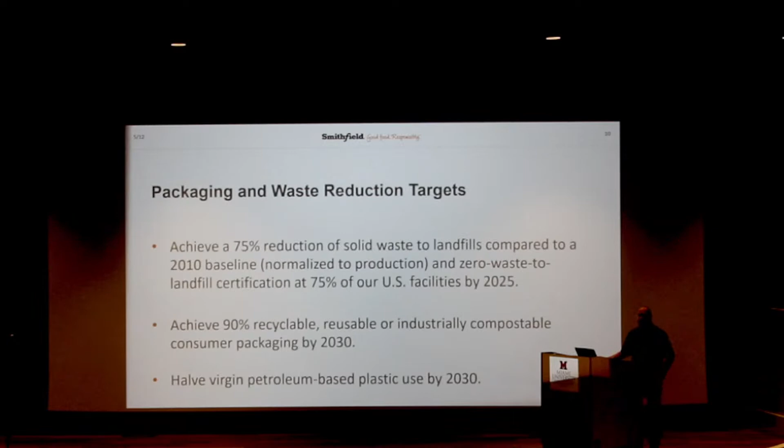We have others with food loss and waste reduction. We've got others with greenhouse gas emission reduction. We've got huge programs for a lot of different things, but we're going to talk about our zero waste to landfill program today. So how do you get there? Like what's the process? What does it mean to be zero waste to landfill?

So we define it internally that you don't send anything to landfill for 12 months in a row. So it can't be just 1 month and go back to putting stuff into the landfill. It's got to be a sustained program, and we audit it every month, and we make sure that we fulfill that. Minimum 10% reduction in total waste from our baseline, recycle or reuse greater than 50% of the waste, and the total cost basically has to be cost neutral. It can be a little bit above, 5% above what the baseline cost is, but effectively it has to be cost neutral.

So, when did we start this whole thing? We started basically out in 2012. We came up with the thought process of having one zero waste to landfill facility by 2018. And this is actually in Peru, Indiana.

So anybody from Indiana? Couple, there you go. So that's great.

And so Peru is just north of Indianapolis, north of Kokomo. And they took the initiative and became our first zero waste to landfill facility. And then after that, again, by 2018, we wanted one. We had 12 facilities by 2018. And right now we have 21 of our 45 or so operating facilities, 50 if you include distribution centers, zero waste to landfill. So we're really making a mark, you know, relative to our peers in the industry. Yeah, we're miles ahead of them.

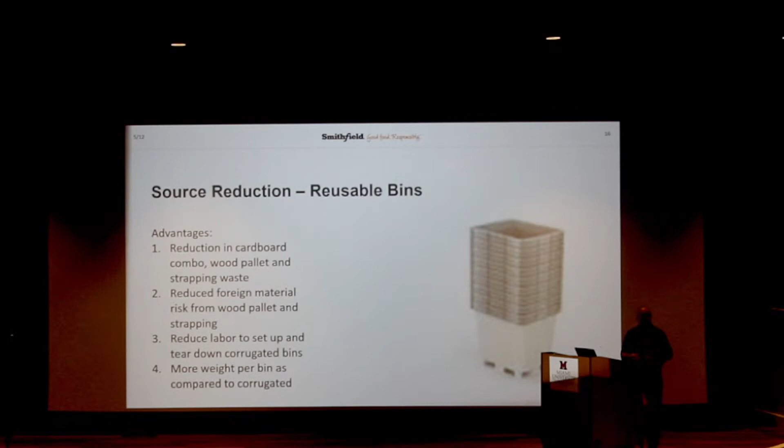You don't need the strapping around it, so it's fully self-contained. And then the other part of it is make it easier for people to do the right thing than the wrong thing, right? To put it in the right place to be recycled versus putting it in the wrong place and have it go to the landfill. So we try to do that at our operating facilities throughout the US, and again, we have it in different languages, right? And we have to try to do pictures, and we have to have receptacles for it to go the right way.

So this is just a picture. We're going to go through a couple pictures of kind of the things that we do. And cardboard is huge because, again, for that cost effectiveness deal that we've got going, it's got to be cost neutral, you know, plus or minus 5%. This is a huge way of getting there. Cardboard, especially baled, goes for about $150 a ton.

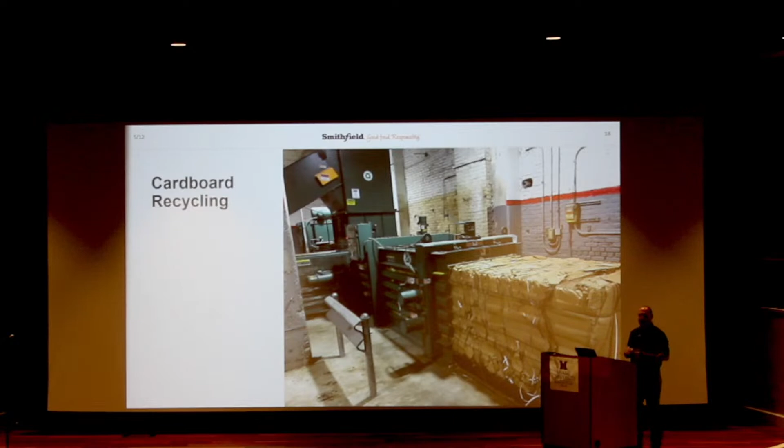And so if we can effectively take any and all cardboard that was going to the landfill, bale it or put it into a compactor, sell it as a product, get $150 a ton for it, right? That funds a lot of the other things that we need to do that cost money to get to zero waste to landfill. So this is our funding source, and we got to make sure that 100% of our cardboard actually does get recycled and none of it goes over into the bin that goes to the landfill.

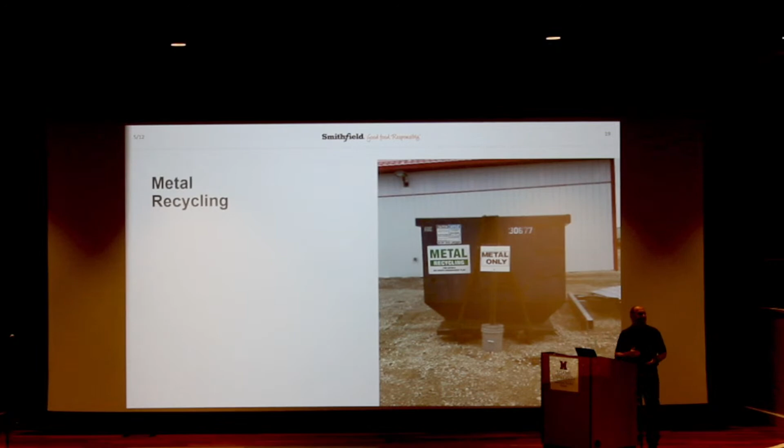So metals too, metals, especially stainless steel, is astronomical price-wise. You get a great rebate for metals. And so we got to make sure that we recycle 100% of our metals and actually separate out the carbon steel from the stainless steel, right? Because you get a better price for stainless steel than you do for carbon steel. So again, that's a revenue source, and we got to make sure that we recycle our metal.

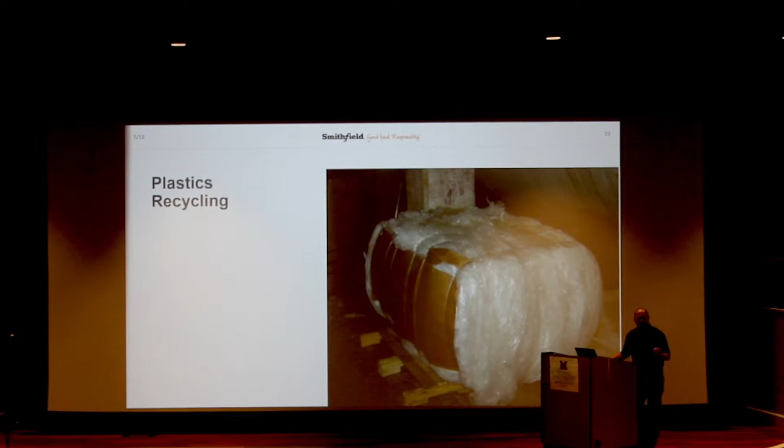And then plastics recycling, this is kind of one of the tough ones for us. They will take clean, like LDPE, low density polyethylene. It's a type of plastic that people like, but really they don't give you a whole lot of money for it these days. And so it's tough to recycle plastics, and especially what we call protein contaminated plastics. And so if it's got a little bit of purge or blood on it, just nobody wants this stuff.

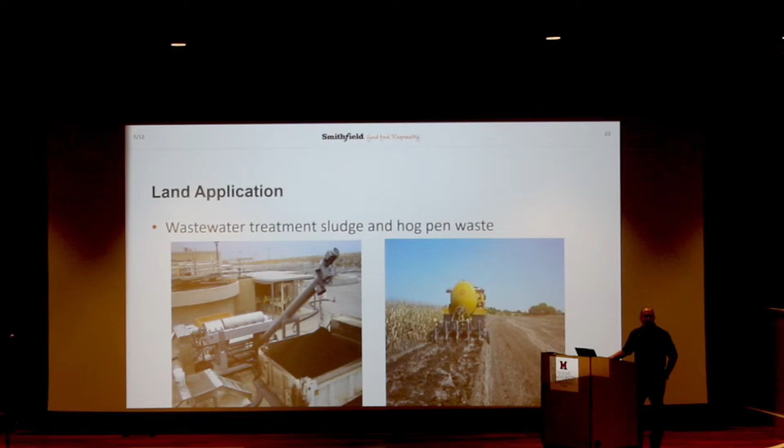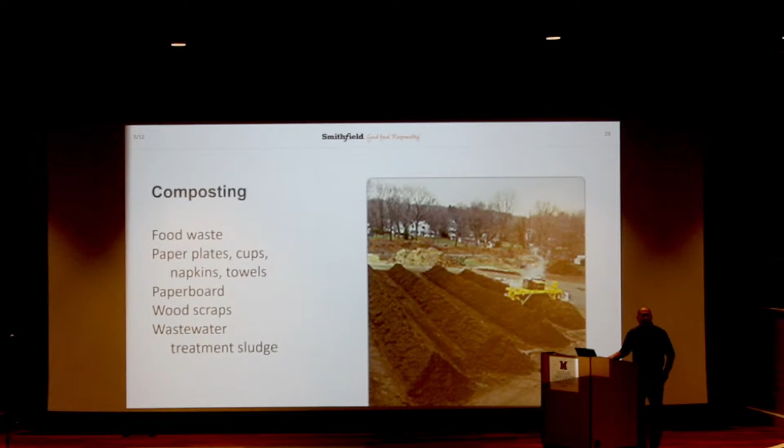Okay, composting is another part of what we do also. Food waste, plates, basically just, again, anything kind of organic can go to a compost facility. Anaerobic digestion, this is really interesting actually, because again, this gets into our greenhouse gas reduction process. We can generate renewable natural gas off of anaerobic bacteria that then generate methane, biogas that is mostly methane.

You strip out everything that isn't methane, and you can inject that into a natural gas pipeline as renewable natural gas. And it's worth about 20 times what normal natural gas is. So this is a big money maker for us. We're spending millions and millions of dollars, actually close to $500 million, on covering up anaerobic lagoons at our hog farms and our operating facilities, and again, generating this biogas that then becomes renewable natural gas. But we can take some of our organic waste to these as well.

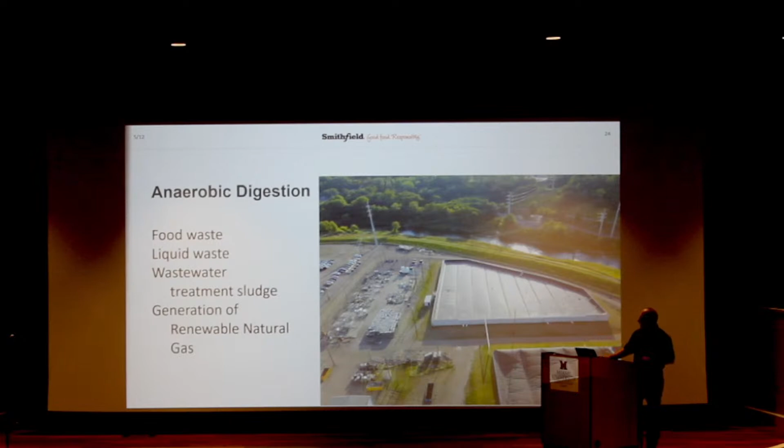So there's commercial anaerobic digesting companies as well. So even if we don't have a farm or an actual facility that has a rendering facility there, we can actually take it to a commercial anaerobic digestion process. And then last but not least, for everything else, and that's typically only like 5–10% of our overall waste product, typically it has to go to a waste to energy facility.

What that is again, instead of a landfill, you burn the trash and you generate electricity off of that. So there's commercial folks around the United States that do that as well for us again, but we try to recycle everything and minimize this because this costs a lot of money, a lot more than it costs to send stuff to the landfill.

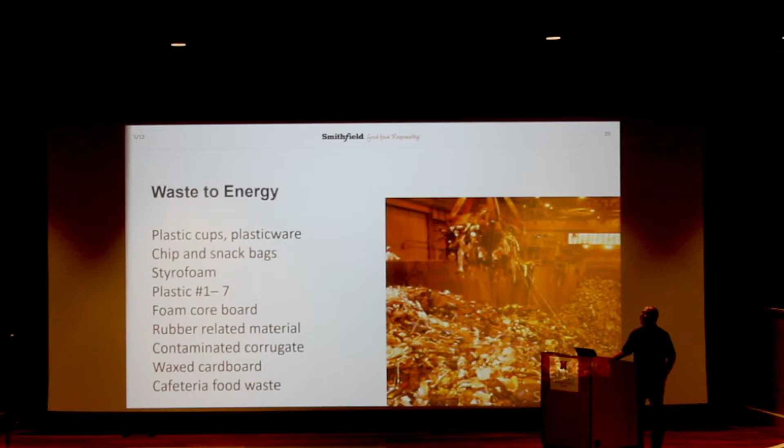So South Dakota folks, anybody from South Dakota? Nobody from South Dakota.

Well, this is our Sioux Falls facility. It's one of our largest ones, second largest next to Tar Heel, North Carolina. And I just wanted to highlight a couple things that they do. It's huge. They employ over 3,800 people at this one plant. It's 105 acres, 2 million square feet of operating capacity at this location. They harvest over 20,000 head a day there, produce 1.6 billion pounds of product, and purchase and use a little under 2 million gallons of water a day. So it's a very, very large facility, sits on the Big Sioux River that runs around it.

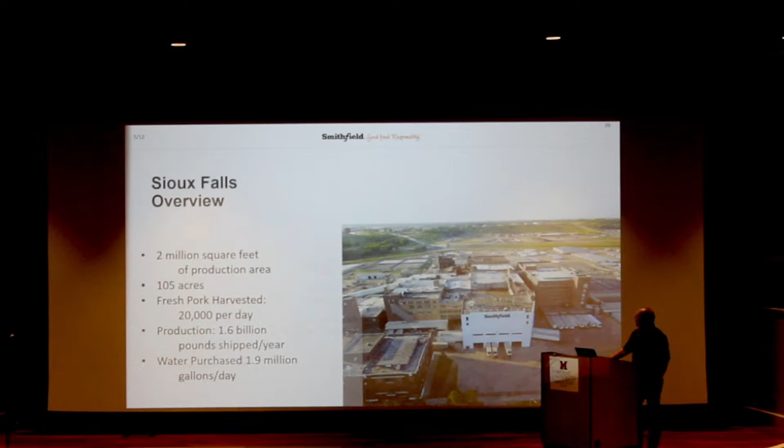But some of the things that we did, again, started in 2012. This is a program where all of our wastewater sludges were going to the landfill. And I went, gosh, that's not the right way to do this. And so we partnered with a firm that helps us out and finds farmers that want this material, and we'll transport it over to these locations. And then when the crops are out of the fields, so once in the spring, once in the fall, we do land application.

And again, for us, 2.4 million pounds a month used to go to the landfill and is now going as a soil augmenter and a natural fertilizer to fields around northwest Iowa. So that's a big thing. And again, cardboard recycling, they do a great job. Almost 600,000 pounds of cardboard is recycled from this facility every month. It is staggering, right?

So we do have a second objective, which is, on a normalized basis, to reduce the amount of tons of solid waste going to the landfill by 75%. When production increases over time, you generate more waste, so we have to kind of normalize that. But our baseline was 2010, and we sent 182 million pounds of solid waste to the landfill. It seems like an incredible amount, but that was based off of a production volume of almost 10 billion pounds. So a baseline of 1.9 normalized solid waste to the landfill per 100 weight of production.

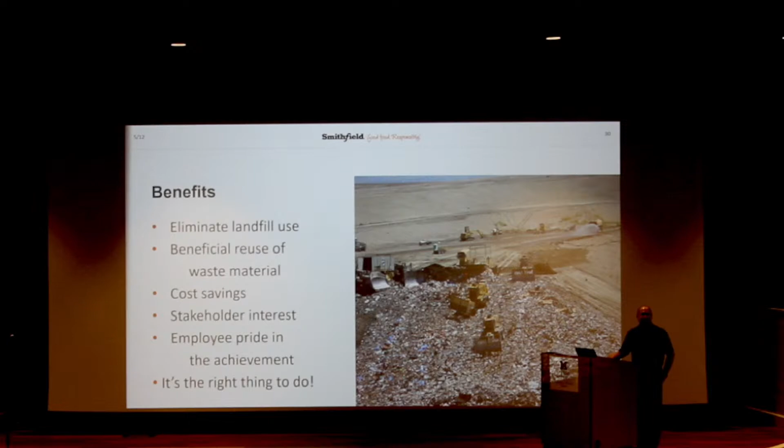So that's what we have on zero waste to landfill. And I hope you enjoyed it.

Do you guys have any questions or anything? Be happy to take a question or two if you had anything. Okay, go ahead.

Yeah, well, clearly that's important in everything, but definitely, we want to find a good partner for recycling. So we want to find actually a company that'll help us out with a lot of different types of materials to recycle, and one that's very stable themselves, right? So they'll be there for 5, 10, 15 years and be our partner.

And they need to be innovative as well and try to find better ways of recycling and better ways of using more of our stuff that we consider waste that would otherwise go to the waste to energy facility. So a lot of it is just partnering with the right people that have the same common goals that we have. And certainly money is part of it, but what they do with it is very important as well. So we want to make sure that they're trustworthy partners. So, go ahead.

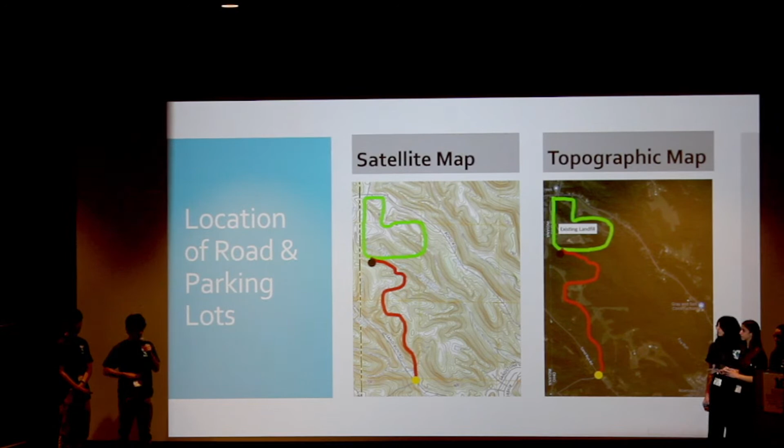And while this site has limited excavation potential, it's not too big of a deal for us because the soil the road is going over has too low of a clay content to be useful in stockpiling or covering the landfill on a day-by-day basis.

Okay, so I'm the environmental engineer and I'm in charge of landfill and site operations. We can use best management practices to make the construction and short-term use of the road more sustainable. Placing buffer strips of forest and vegetation along the road and streams will reduce soil erosion and runoff. To prevent sediment and dust pollution, which impact soil and water quality near nearby streams, we'll spray construction sites with water. Avoiding the use of heavy equipment during and after rain will prevent soil compaction.

Also, using recycled glass and asphalt and following the 4 R's of waste management, reduce, reuse, recycle, and repurpose wherever possible, will minimize the project's waste stream. Finally, we should reduce the area disturbed by construction to protect wildlife habitat. To operate a municipal solid waste landfill like Bond Road, we'll need to follow regulations and guidelines set by the Resource Conservation and Recovery Act and Hamilton County's Solid Waste Management District. We should also implement long-term best management practices to maintain the site and protect environmental and human health.

The new extension currently being planned for the landfill will decrease the amount of leachate, which is water that trickles through the landfill and becomes contaminated by chemicals in garbage, that needs to be collected. However, leachate collection systems are still very much needed to remove it from the landfill to reduce the risks of it seeping through the liner and contaminating nearby soil and groundwater.

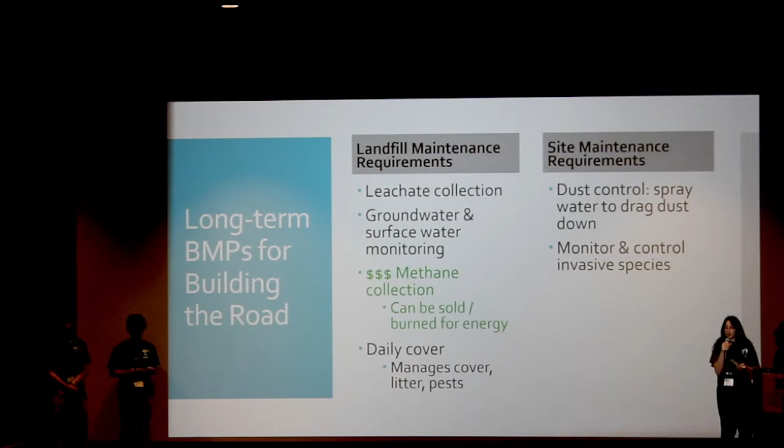According to Daniel Thompson, a wildlife expert, disturbed sites are easily overtaken by invasive species, so monitoring should be done to prevent the spread of species like bush honeysuckle or Callery pear. If the plants are small, they can be controlled with physical methods, and herbicides can control them if they grow too large. As the environmental consultant, I'll be addressing measures that we can take to improve habitat, wildlife diversity, and aesthetics at the site once construction is completed.

First, planting a perimeter of trees around the site will reduce noise escaping to the community, hide unsightly views, filter air and runoff, and create valuable edge habitat for edge species like white-tailed deer and wild turkey. Further, these trees could be planted by volunteers or students as a community service or education initiative.

In these perimeters, native oak and gum trees should be maintained as they grow very well in southwestern Ohio, which has led to a concentration of oak gum forests in Hamilton County. Maintaining these oak and gum trees will lead to production of both hard mast in the form of acorns from the oaks and soft mast from the gum trees, which will attract a wide diversity of wildlife that consume both hard and soft mast.

In addition, spring ephemeral flowers planted around the perimeter and throughout the site will attract pollinators that feed on the flowers' nectar and pollen, creating very much needed pollinator habitats. Another improvement we can make is turning the existing man-made pond on the newly purchased land to a man-made wetland, which has numerous benefits such as slowing runoff, allowing more water to infiltrate, acting as a sink for nutrients and pollutants carried by the water, and providing habitat for wildlife.

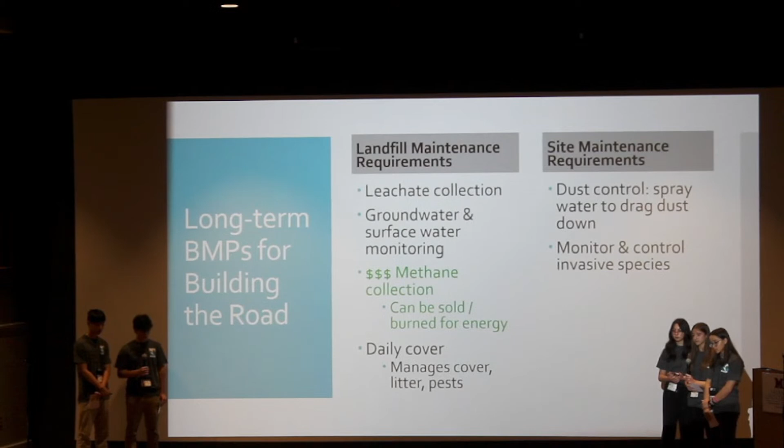So yeah, you did a very good job covering a number of questions. You did talk about the route you chose, but I wonder if you could speak a little more about the alternatives you looked at to this route, because I'm sure that was a prime consideration.

So one of the major limitations was that there's a lot of very tall peaks. So we wanted to take the most direct route possible, but also avoid any super sharp turns. So we originally tried going left, but then we found we're too close to the Indiana-Ohio border, so we would cross state lines, and we wanted to avoid that. And going right, there is the Fox Run River, so we wanted to avoid building over the river. So we thought it best to navigate through the summits and peaks and go through the valleys, and in doing that, it's a more direct route. We're avoiding state lines, and we're avoiding the river.

And also when we were planning, we noticed, looking at the soil map, that there was only really this one particular stretch of the land that we constructed our road into that actually did not have as severe limitations for building. So this also takes that into consideration and plans to build the road specifically on that stretch of soil.

Yeah, the strip we built the road on, the vast majority of it is the Switzerland Silt Loam Road, and that has far less limitations in terms of steepness, so we thought it best to build the road there. Also, the main problem with the current entrance is that there's a very sharp turn, or many of them, that are hard for large garbage trucks to pass through.

So in building this new road to increase utilization of the landfill, we really want to reduce the sharp turns and sharp high peaks that the trucks would have to go through so that they can carry more trash to the landfill and increase its efficiency and utilization.

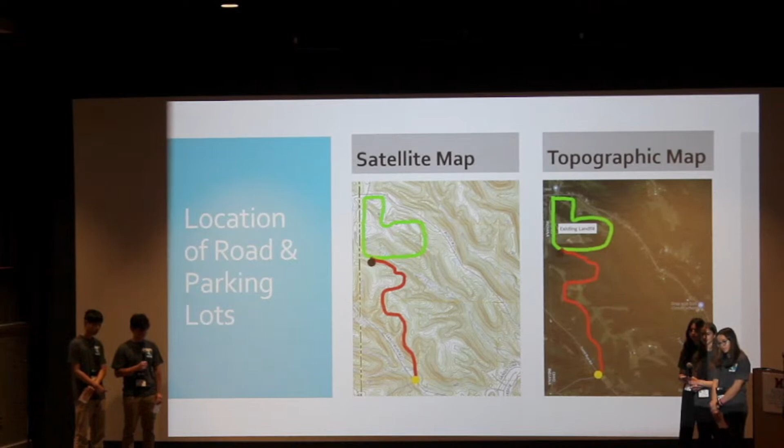Hi, your presentation has been wonderful. I do have a concern about the possibility of finding endangered bats and relocating them. Would that possibly cause more stress on their population and have a negative effect? And I'm also wondering if they might have a fidelity to a certain roost and they may want to continue to return. I just wonder if your plan has anything that can consider that possibility.

Right, so I'm pretty sure it's well researched that bats, when they're relocated or pushed away from their habitats, usually they're settling there because it's the most optimal habitat they could find. And in breaking up their roosts and their social groups, they split up, and so their roosting sites are less ideal. Unfortunately, that is a problem that we currently have.

First we want to see if they're there, and if they are there, we will see, sadly, a decline in the idealness of the relocation of the bats, but unfortunately that is something we would have to do. Yes, and the first thing we would do with regard to the bats is follow all actions in line with the Natural Resources Conservation Service bat conservation measures. So when doing our survey, we would do everything we can to ensure that they are not disturbed.

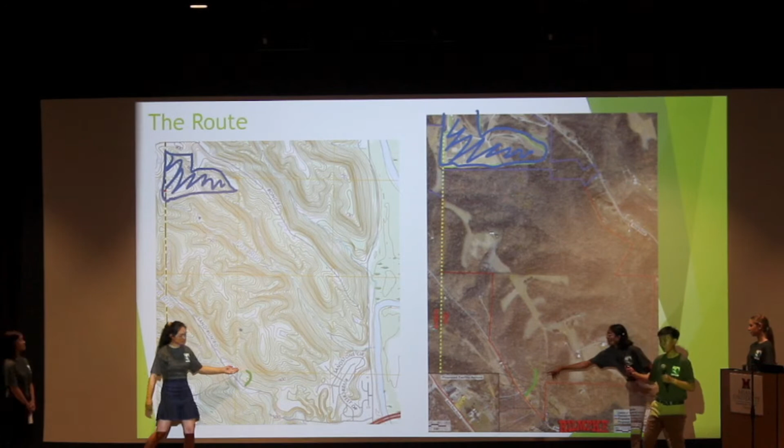Here is our first section of road. In this first section, we wanted to distance ourselves away from Sand Run and allow for adequate setback. To do so, we have our road first run north before running to the northwest. This allows for some distance between our road and Sand Run and thus minimizes its disturbances.

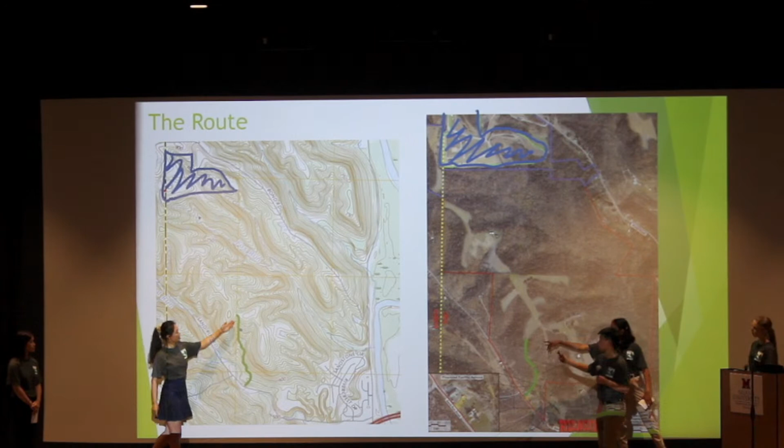Our second section of road goes straight up a steep valley, allowing us to better channel and control our water runoff. This valley has a concave plan, which means that all of the water that runs into this valley gets channeled straight to the center. If instead we had chosen to use switchbacks or gone along a contour line, our water would have dispersed everywhere, and our runoff and pollutants as well.

Additionally, either of those two methods would have required a steeper and thus more erosive slope than the max of a 16.6% grade seen going up this slope. By using this natural valley, we help channel our runoff, and thus we can reduce the impacted area and better target our runoff to remove pollutants before it enters our surface waterways.

Our third section of road takes us up onto the relatively flat and pre-developed ridgeline, thus reducing the amount of additional disturbance required, the erosion potential, and thereby sedimentation. Furthermore, this tall ridgeline is underlain by silty clay and silty clay loam, a relatively more permeable soil than that of the adjacent areas, allowing us to better minimize runoff.

On this ridgeline, we try to follow the pre-existing contour lines as much as possible, to keep our road as flat as possible. We also chose to build our road on the northwest side of the central ridge rather than the southeast side. This allows our water to run off into the Fox Run watershed, which is better vegetated and thus allows for more natural filtration before our water enters the Whitewater River. This can help us preserve the pristine, exceptional warm water habitat that the Whitewater River currently presents.

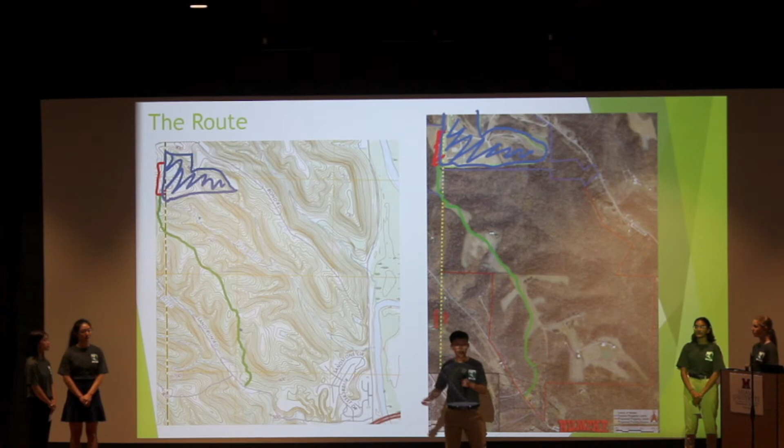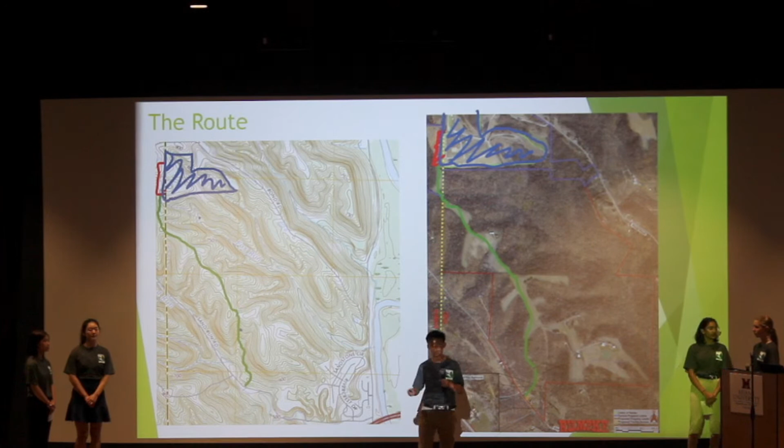Finally, we recommend that your parking lot be placed on the southwest side of the landfill. This area is the flattest and least vegetated, thus reducing disturbance and erosion. With this road plan in mind, Robin will tell you about the best management practices that we will use during the construction process to help our neighbors and protect the environment.

We've prepared a series of short-term best management practices in order to mitigate the immediate effects of construction. First, we'll construct from uphill to downhill, and this will help reduce sedimentation. This is because sedimentation that occurs from uphill construction will be filtered out by the pre-existing vegetation downhill. We'll apply the same practice to any demolition, and also move any demolition waste along pre-existing roads in order to reduce soil compaction and reduce the amount of unnecessary access routes.

We'll also be working during working hours. That way we'll help mitigate any possible complaints about noise. Timing is key, and we plan on starting construction in early October. This helps reduce the risk of removing any important trees that serve as critical summer roosting habitat for bats. We'll also be planting sunflowers to help mitigate the effects of PAH, a toxic chemical produced by asphalt, and maintaining as much vegetation as possible to reduce soil erosion. Next, Neri will talk a little bit more about how we're mitigating invasive species.

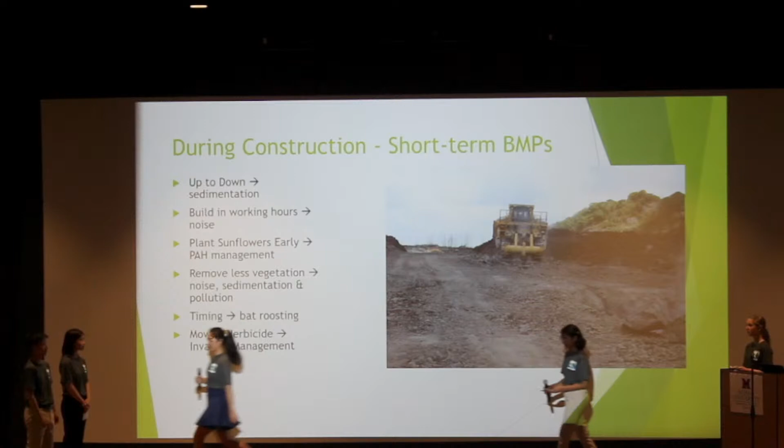To manage invasive species along the roadways constructed, we recommend mowing and applying an herbicide with a short half-life, such as triclopyr, on these cleared areas in order to prevent any hidden or dormant invasives beneath the soil from taking over these roadways after a disturbance event.

We recommend using an herbicide with a short half-life because that allows the herbicides to get decomposed and broken down in the soil much faster, so we can start planting native grasses again. You could also plant Indian grass or an endangered buffalo grass as phytoremediation techniques to remove trace herbicides and detoxify the soil.

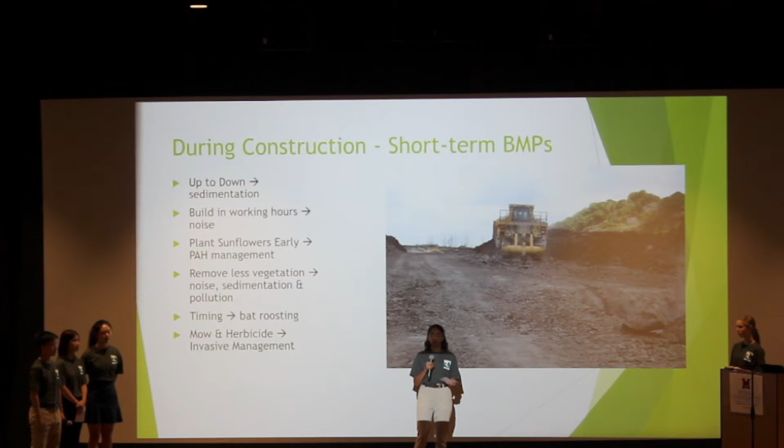So now moving on to some more long-term BMPs. How did we engineer our road to help you guys in the future? So we had 3 main goals going into this. First of all, we wanted to protect your road surface. Second of all, we wanted to minimize the amount of runoff. And third, we wanted to prevent any wildlife and vehicle collisions.

To do so, we recommend that you establish a high crown yet impervious road surface. While we considered the implementation of permeable pavement, this is not the place to do it. The high shrink swell potential of the underlying clay soils would result in high stresses to your roadway every time it rained and dried, meaning that your roadway would have needed frequent repair.

Instead, by implementing an impervious yet highly crowned surface, every time it rains, we can divert that water off the roadway into our lateral infiltration ditches. In these infiltration ditches, we will place perforated pipes to direct this runoff away from our roads and into the adjacent vegetation and soils to reduce runoff.

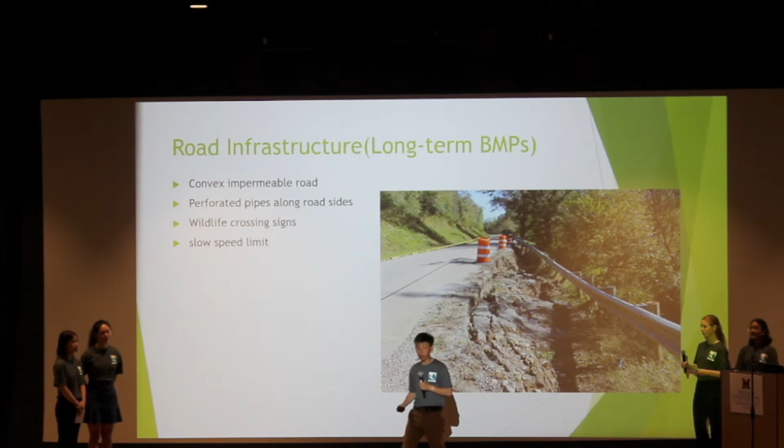To prevent wildlife collisions, we recommend that you keep this roadway at a max of 15 miles per hour and place wildlife crossing signs wherever appropriate. With this in mind, Caroline will tell you about salt application on your roadways.

One way to reduce the negative impacts of road salt on our soils, forests, and waterways is to mix the salt with beet juice. As crazy as this sounds, the beet juice gives the salt a distinct color, so when applying, it's very easy to tell where it's already been applied. So appliers can easily tell where it's been applied and avoid reapplying in that same area, thus avoiding over-application.

Another strategy we can use is to apply a thin layer of sand to the road. Sand increases friction, increasing traction, and reducing the need for road salt. These strategies have been applied in many areas across the US and have been extremely effective at drastically reducing the amount of road salt in our streams and waterways.

We'll also be implementing buffers throughout the site. These buffers have a variety of important impacts. For one, the vegetation helps hold the soil in, thereby reducing soil erosion and sedimentation. They also add organic matter to the soil, which has a lot of benefits. It improves soil structure, improves water retention, and improves filtration.

These wooded buffers will also help as a barrier to noise, which will both address community concerns about noise and also help reduce disturbances to wildlife. They also act as important wildlife habitats and serve to add to the aesthetics of the site, because who doesn't love looking at trees? Next, we'll be going into all the different buffers and where they'll be located.

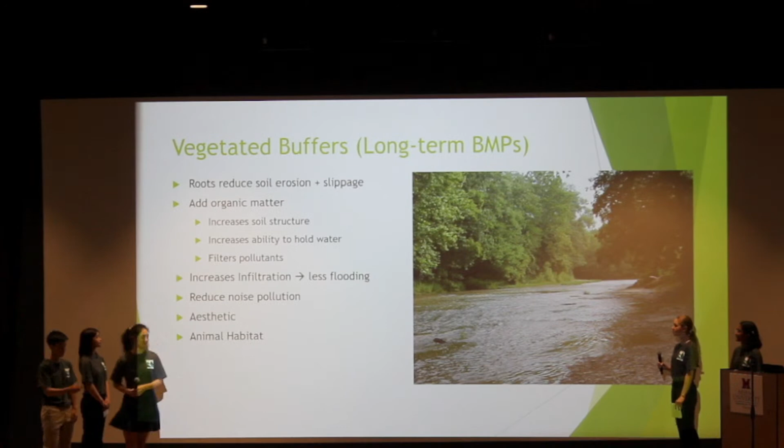We recommend to establish pollinator habitat covering the entirety of the upper flat ridge lines. This provides many benefits, the first and foremost of which is that it reduces runoff and erosion by stabilizing topsoil with roots, slowing and taking up water, and filtering sediment and pollutants. It also provides habitat for pollinators.

Pollinators pollinate 75% of native plants, which is incredibly valuable for creating a rich, diverse plant community. They also pollinate 1/3 of crops. This is incredibly helpful because it can provide community benefits for local residents by pollinating their gardens and farms.

For maximal benefits, we recommend species such as butterfly weed, milkweed, wildflowers, legumes, and a mosaic of warm and cold season grasses. These flowers will be very aesthetic as well, especially in spring and summer when the flowers are in full bloom. Though these habitats are expensive and take much time and dedication to establish, once implemented, they are quite easy to maintain and are still incredibly effective at addressing our environmental concerns.

Another way we can provide habitat is to erect nest boxes for birds and bat boxes for bats. Bats in particular have been heavily impacted by human activity, so any habitat we can provide is crucial. We'll also be implementing wooded buffers throughout. For one, we'll put more woody buffers on steep backslope areas. The deep roots will help hold the soil to the bedrock and prevent clay slippage.

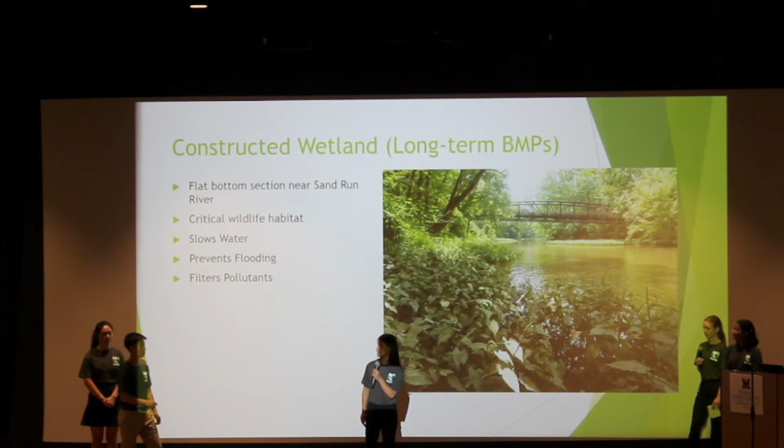Now, I acknowledge that you guys at Rumpke may be hesitant to implement these best management practices due to their high upfront cost. But I am here to tell you that multiple studies from the EPA actually show that they are economically beneficial in the long run. Now, why, right? So buffers and their associated structures are outstanding natural filters and act as outstanding natural flood control, saving you millions in flood damages and water filtration.

Additionally, the improved aesthetics are simply invaluable. It improves your property values and generally bolsters the happiness of your community. Not only does it improve the view of Rumpke and the public view, but this will make it easier for you guys to garner the support of politicians and city commissioners to support your future projects and ventures, because they are more likely to support a project that is seen favorably in the public eye.

With all these practices in mind, we, Greenway Solutions, are proud to help you achieve waste to resources. Thank you.

Time was 19:25. Okay. Question.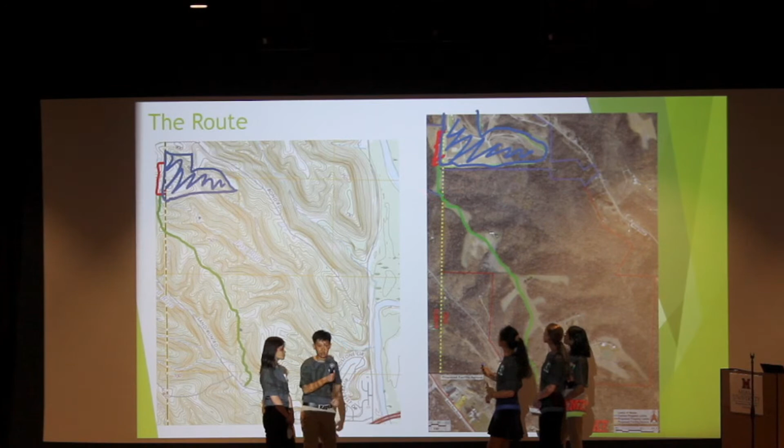And is the parking lot where the scale house and wheel wash will be as well? We were thinking that the wheel wash could be at the base of the site near the entrance, because that way any trucks, their wheels have been everywhere pretty much, it would wash off any invasive species, any seeds, or anything that could bring them in. It would wash them all off and make sure they didn't get into our property. Yeah, basically the closer to the end we get, the less probability that it goes somewhere we don't want it to go, right? So that's why we want it at the end. And also the less time it has to gain some velocity and cause erosion. So the closer to the bottom, the better.

I got another question, maybe. Just downstream from Fox Run, I remember seeing on the map, there's a kind of a development, and then in Indiana, not too far away, there's a school. To what degree did you think about your messaging special to those communities that are just downstream or more sensitive, like schools, which tend to be more sensitive when you're doing things like landfills? Had you given that some special outreach thought, and like what your outreach plan would be?

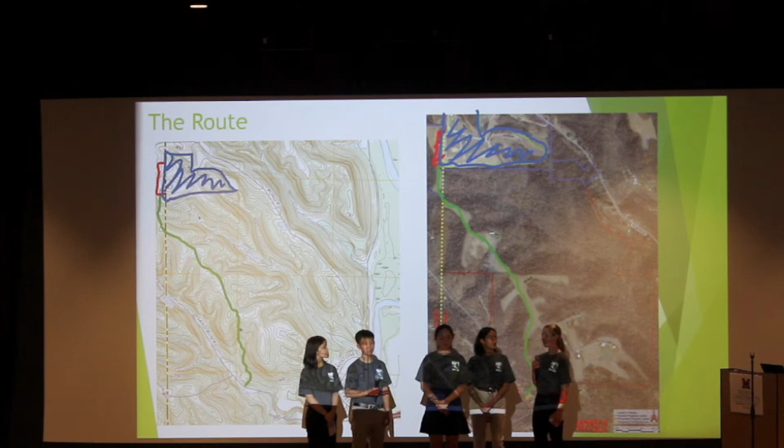Yeah, definitely. We would have some outreach programs, and we want to educate the schools and the people nearby about the risks of living near a landfill, but also we can reassure them about how conservation buffers and our best management practices will help protect them from potential contaminants in landfills running into their residences. It's also a great opportunity to teach about pollinators and wetlands and all the wildlife and plants that live here, because of all the natural habitats we have implemented. One consideration that we had was to establish a walking trail up along the side of our road, because we already managed for the infiltration.

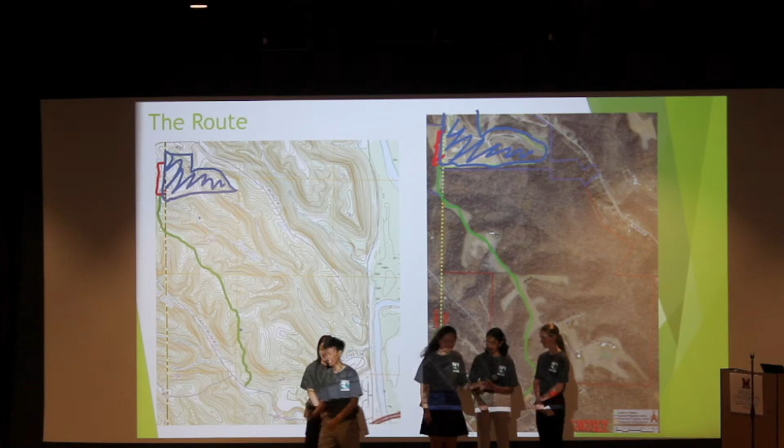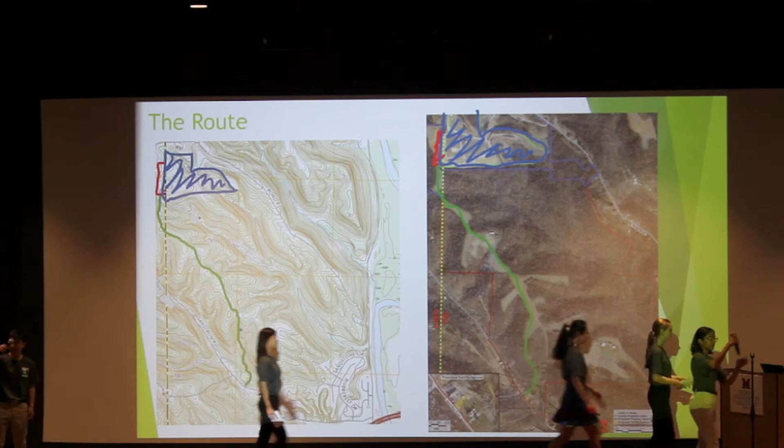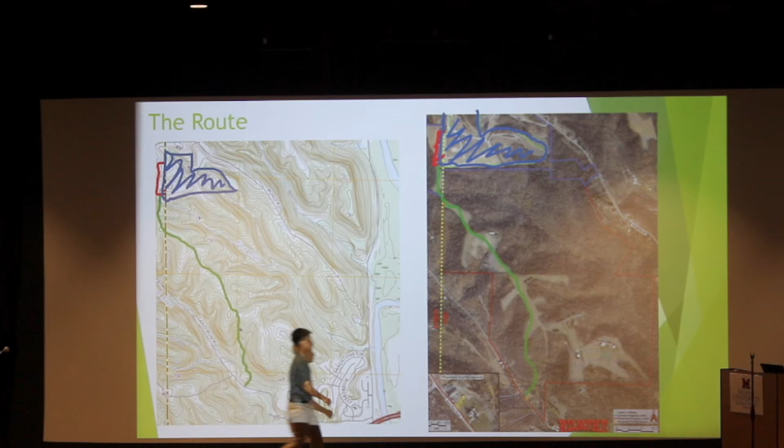Okay. Sorry about that. Thank you for the questions. Oh, thank you guys. Whoa. All right, everybody keep your seats because I think our next team is ready here. So just give me a minute. All right, everybody put your hands together for team 2222. Okay. We are Team 2222. I am Sienna. Can we start? All right.

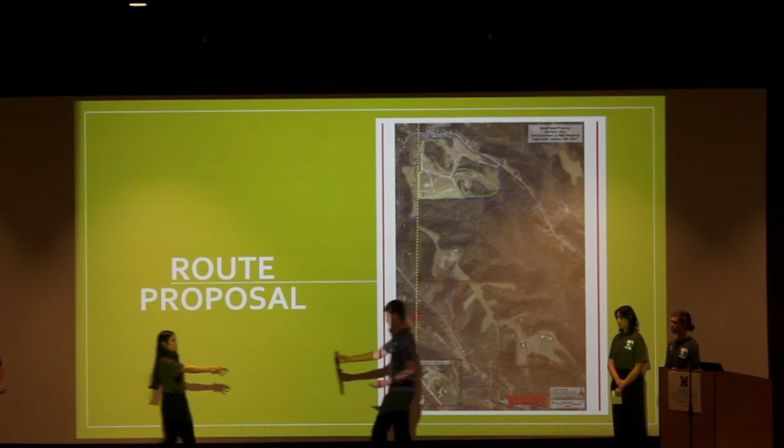Behind me now, you see our suggested route from the Sand Run Road up to the current Bond Road landfill. Now, this entire site is unfortunately highly limited for local roads and streets, but we have chosen the currently deforested area that was once a residential area because this is the only region that has only 3 limiting factors limiting its construction. So we will have to contend with shrink swell capacity, which is where the soil will shrink and expand, frost action, which is where the soil underground can actually freeze, and the low strength, which of course presents a problem for our trucks, which will be driving atop it.

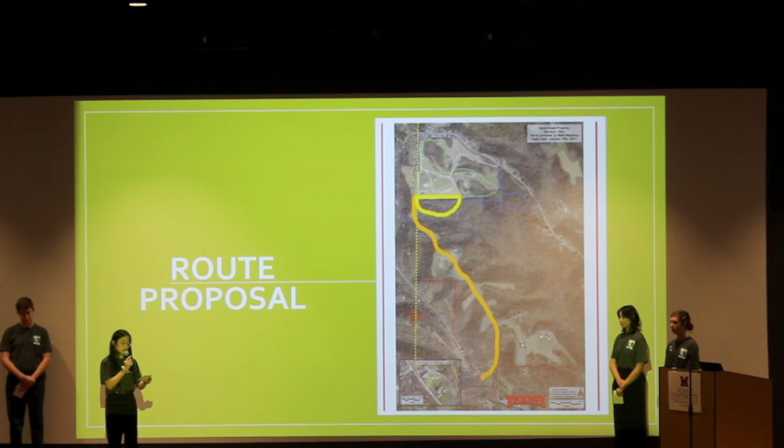However, these 3 problems can all be remediated by adding components to the soil. We suggest specifically adding calcium carbonate or lime, as well as sand to remediate the low strength of the soil. Unlike the other sites on this region, we do not have to contend with slope. As you can see, it's at the top of the ridge. We do not have to contend with slippage, and we do not have to contend with flooding by using this location. Moreover, since this region has already been deforested, we will have limited soil disturbance and deforestation necessary at this site.

And finally, you can see that the region marked in yellow is the projected expansion for the Bond Road landfill, and this will allow us to access that expansion once it is constructed. Now I will pass it off to Josh to talk about our best management practices.

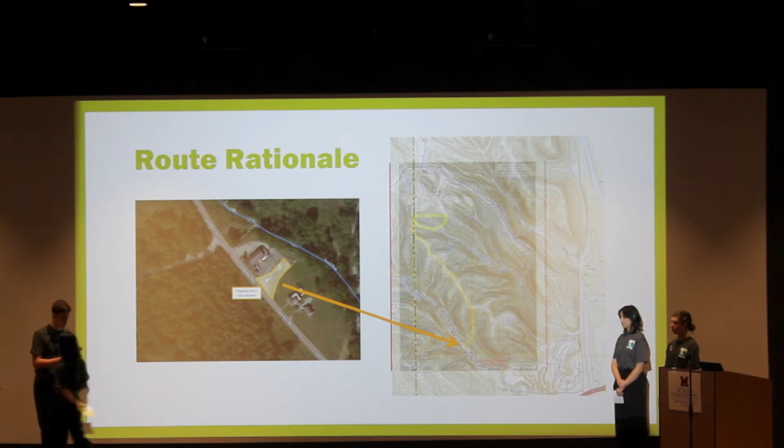Before we begin construction, there are a few surveys that we need to complete in order to ensure that this is a viable place for the road, parking lot, and entrance. First, we have used soil data from the National Cooperative Soil Survey to craft this management plan. However, we have not gone and sampled the soil in person, so we would definitely recommend going on site to the location to sample the soil to determine its composition and suitability for these management practices that we recommended. For example, Lena mentioned some issues like low strength, and some of these can be remedied by adding chemicals to the soil. However, we don't want to add these unless it is absolutely necessary.

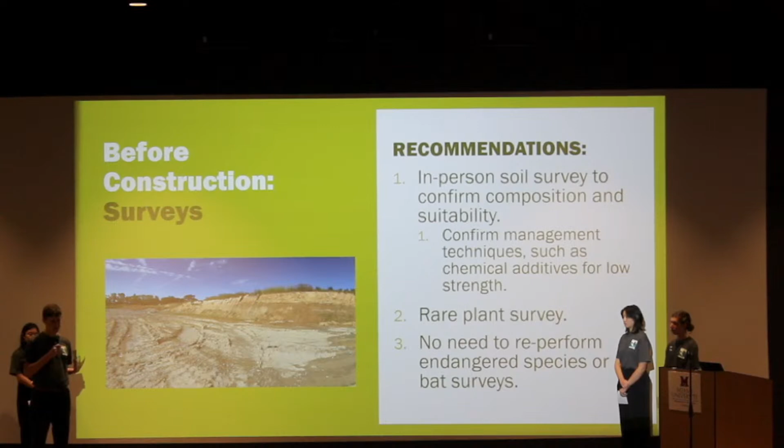Second, we need to conduct a rare plant survey to determine if there are any threatened or endangered species in the area, and if there are, we may need to modify or alter our plans because we want to leave these species in their habitat to ensure their longevity. Third, we have been informed by Rumpke that they have already completed the Endangered Species Survey and the Bat Survey and found that there were no endangered species nor bats in the area, so we do not need to reperform those. And as of now, the site is viable for building our road, parking lot, and entrance pending the results of these other surveys. Connor?

In addition to the ecological surveying that Josh has mentioned, we also need to maintain compliance in terms of the preservation of our cultural resources. In this case, pertinent legislation at both the state and federal level includes the National Historic Preservation Act, which necessitates that all federal agencies prioritize the conservation of our archaeological sites during projects that require the excavation of soil, which in this case is necessitated by the fact that we are building a road. Due to the procedure being started by the excavation, the Ohio State Historic Preservation Office is also concerned, and they necessitate that a comprehensive cultural resource survey must begin before any actual construction or excavation on site begins.

As there is not strong historic precedent for the finding of archaeological sites in Southwest Ohio, specifically Hamilton County, we did not find any archaeological sites in the preliminary surveying, but in the event that further archaeological sites are discovered as we begin to excavate, workers and the excavation would immediately stop, and then the Ohio State Historic Preservation Office would be consulted before any further actions are taken. A process called mitigation would begin, where those artifacts are taken off of site and preserved so that we may account for the indigenous cultures that occupied this land before we are using it now. On to Sienna.

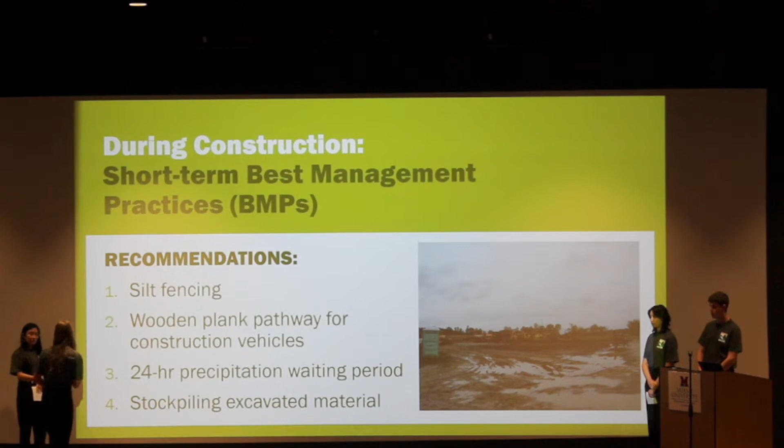Education and outreach. So we know that there have been many community concerns about Rumpke operations in the past, and we would like to take into account the local demographics and include the community in this process. So town hall meetings and local paper publications will be used to publicly state the results and updates of monitoring and testing that is done by the company Rumpke. And we would also like to try to battle the misinformation campaign that is currently online by establishing Rumpke's own personal online social media platform.

This way it can give information directly to constituents and therefore try to dispel any untrue claims that are ruining Rumpke's reputation. With this, we can help build a sense of transparency and a trusting relationship with the community, by them knowing that we are also taking their interest into consideration along with the environmental impacts that the company may have. Connor?

One of the main concerns that was voiced by nearby residents through the voice of the Cincinnati Post was the issue of flooding near the Sand Run entrance to the proposed road, and the fact that that flooding may be contaminated with runoff leachate from the landfill. So first we must understand what leachate is. Leachate is the byproduct of when rain falls on top of a landfill and then percolates through the profile of the landfill, picking up hazardous organic materials and heavy metals, which by the time the leachate is fully formed at the bottom of the landfill, would be too hazardous to emit back into the environment for fear of damaging natural soil and water resources.